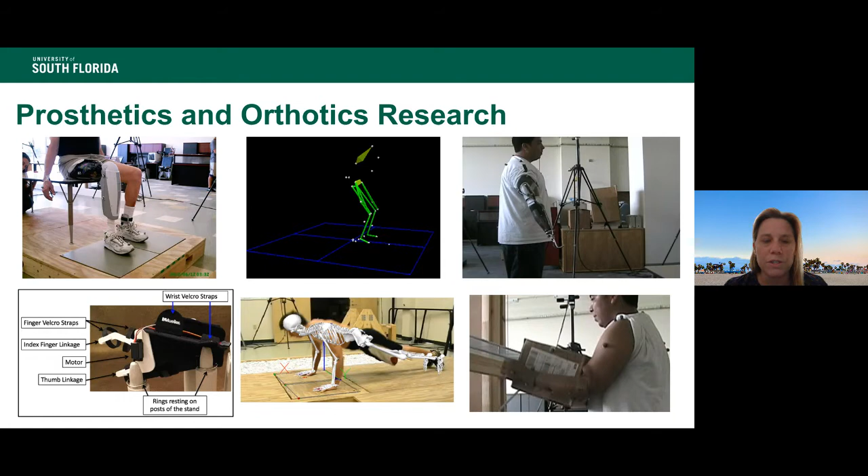So this is another project we have specifically for vocational rehabilitation. This is a virtual reality system to help train people with disabilities to get back to work, or sometimes it helps with job placement. We have a screen that we can set up with virtual situations, or we have a head-mounted display. They can work with their job coach to understand what's required of a job, or to practice particular job skills before going to an employer and trying to get a job.

We've been testing it with people with autism and traumatic brain injury, so more cognitive issues, but it's also being set up in a more portable system to try to get it into some school systems to help people with autism at an earlier age. After they go through this program, they would have a job training certificate that they could take to an employer to help with job placement.

We also have some robotic-based projects, and these are led by Dr. Redwan Alqasemi. He has various robotic arms and things that are commercially available, but what he does in his lab is add to some commercially available products and puts them on wheelchairs, adds some sensors and maybe a Kinect and some various software, working with computer scientists, and makes these types of robots helpful for people with disabilities.

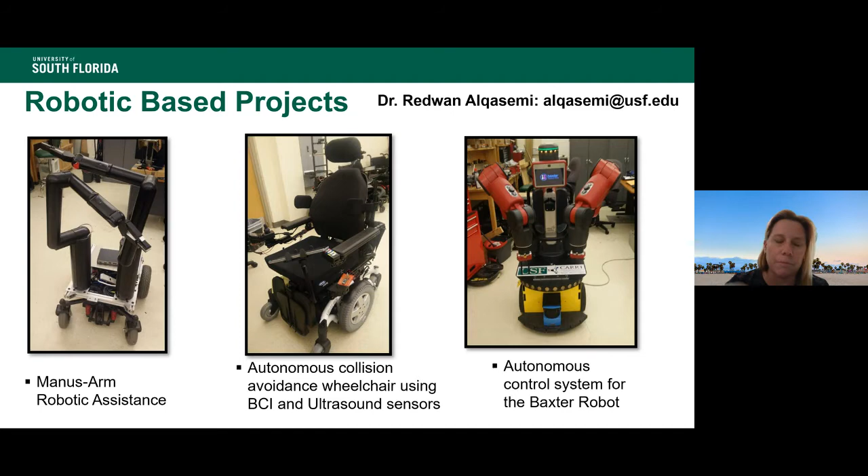A lot of times there might be collision avoidance systems that help people in a wheelchair get in and out of cars and in and out of tight spaces, or it might be a robot that can be sent out to do tasks and activities of daily living if you can't do those yourself.

I know I'm running out of time, so I'll speed up here. These are just some examples of this autonomous pick and place, where you can tell the robot to go get it. It uses 3D computer vision and will figure out how to pick up your different tablets and things if you are somehow confined to a wheelchair, for instance.

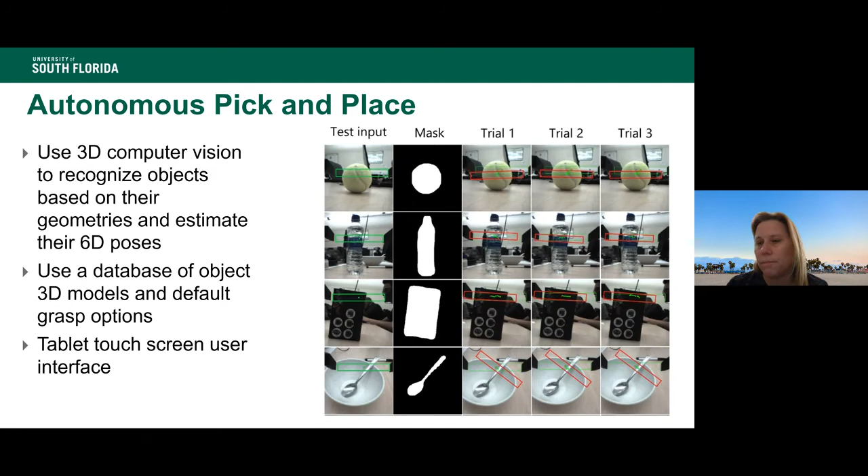We also have a CAREN system, which is a computer-assisted rehabilitation environment, and I believe Dr. Reed's probably going to talk a little bit more about it. Basically it's a virtual reality system that also has some biomechanics and a split belt treadmill and some force plates. So we can really look at some biomechanics and how people move.

I've been working with some groups looking at military training and injury prevention. We also test different prosthetic devices on here. And I've also been working with a former mechanical engineering grad student who now works at Johnson Space Center, looking at exercise devices for spaceflight.

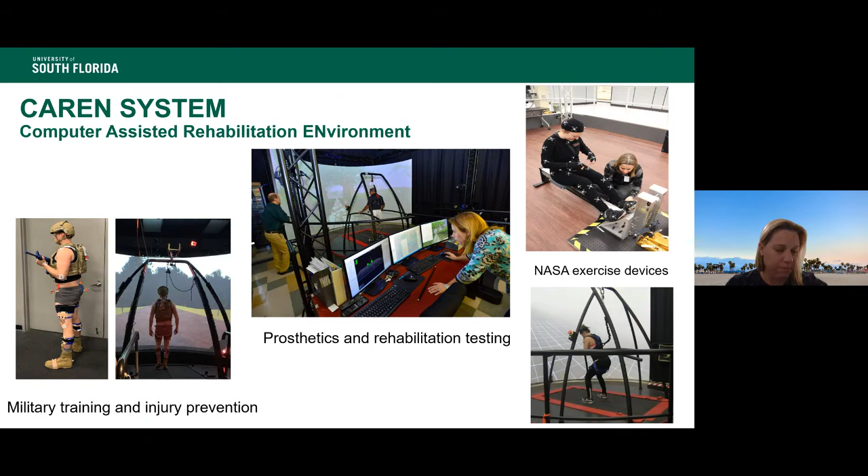I just want to mention that she had a NASA fellowship for her funding for graduate school. So that's something I could definitely help out with as well, looking at NASA fellowships as well as Florida Space Grant fellowships as a way for funding. So that's it for me.

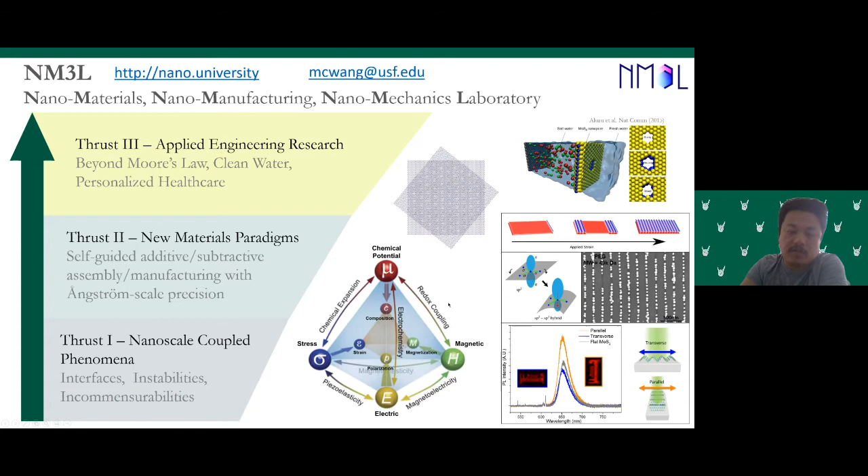So how does deformation, different stacking order, and defects in these nanoscale materials affect their interfaces, their instabilities, as well as what we call incommensurabilities? So we're looking at the coupling between processing, property, and structure relationships at the nanoscale, and using it for various applications. This is really what our focus is on: these atomic scale materials.

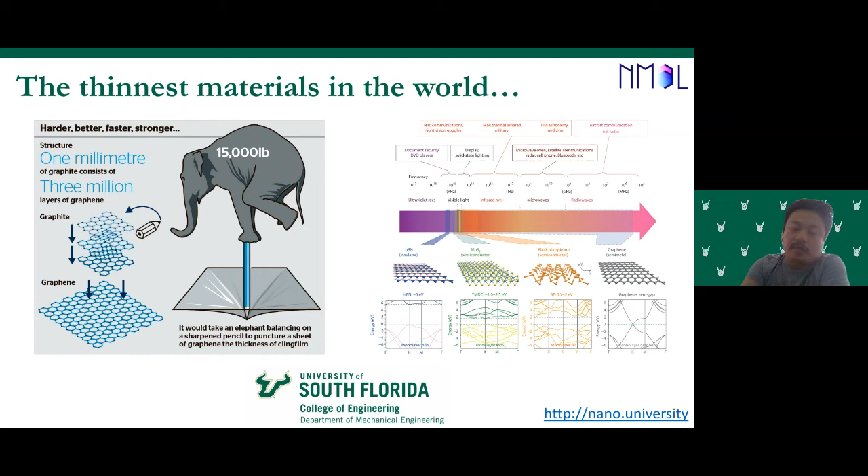A lot of you may have heard about this wonder material called graphene. Essentially, graphene is nothing but pencil lead isolated down to its atomic scale. There are actually hundreds of similar types of materials that span everything from insulating to superconducting to magnetic materials. We explore the whole gamut of these materials, using them to make devices that can supplant existing technologies across the electromagnetic spectrum.

A few topical research thrusts we have right now, some of them biomedical related with COVID, are nanopore-based biomolecular sensing and sequencers. Currently the gold standard in COVID detection is RT-PCR, reverse transcription polymerase chain reaction. This requires taking a swab, isolating the COVID RNA sequence, amplifying segments of that, and looking at fluorescent signals. That's a relatively slow and sometimes inaccurate technique, and it becomes very unreliable, especially with mutations, because you have to know what to look for to get the answer you want. When there are a lot of mutations, that can give false negatives.

Whereas for nanopore-based molecular sequencing, it's a brute force, straight-read technique where you're reading single nucleotide base pairs at a time. We're working on this technique using 2-dimensional materials—essentially you punch a hole in these 2D materials and look at the translocation event of DNA or RNA as they go through a membrane.

We're also looking at the interaction between these atomically thin 2D materials and biologic systems, looking at their cytotoxicity and genotoxicity, because even though these materials may be benign at the macro scale, when you change their shapes and sizes down to the nanoscale, there could be different interactions. So we're studying that, and we're also looking at phase change and defects in these materials.

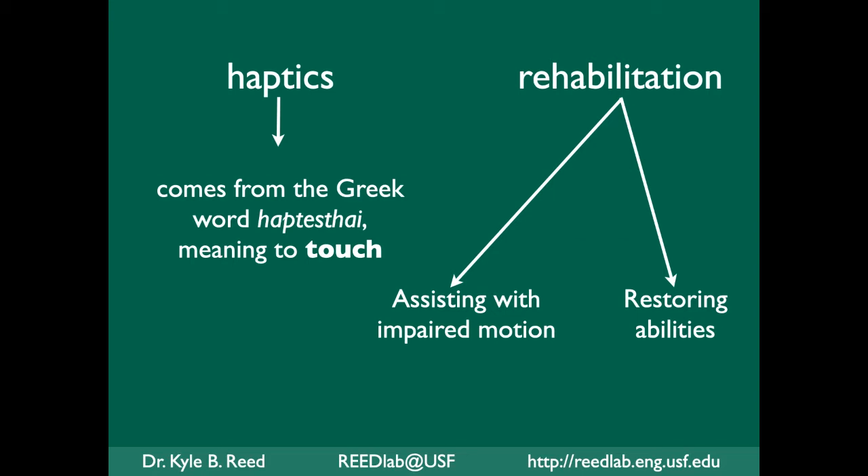The two primary areas I look at are haptics, which is the sense of touch—every time you go into your pocket and try to pull out your keys and figure out which one it is based on touch alone, that's the sense of touch, that's haptics, tactile interaction. I also look at rehabilitation, assisting with impaired motion or restoring people's abilities. Haptics and rehab actually have a lot of carryover, because haptics is trying to make healthy people's sensations better, while rehabilitation is trying to take someone with a disability and improve them. So I'm starting at different points, but trying to make everybody interact with the world better.

One example of this is looking at a bimanual motion.

If you would like to try this, you can download the app called Pat and Rub. It's only on the Apple store right now, but we'll look at porting it sometime. It's based on the idea of: can you pat your head and rub your tummy at the same time? We're trying to see what you can do with two different hands.

That's the haptic side of it. The rehab side is that you can actually use your healthy arm, when you've had a stroke, to rehabilitate your impaired arm. So we're trying to understand these bimanual motions in healthy, unimpaired people, and then apply that to helping restore motion in someone who's had a stroke or other neurological impairment in the brain.

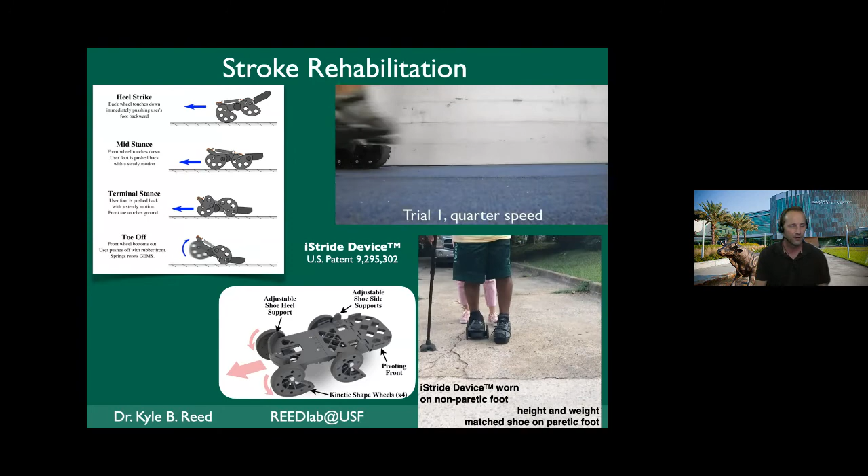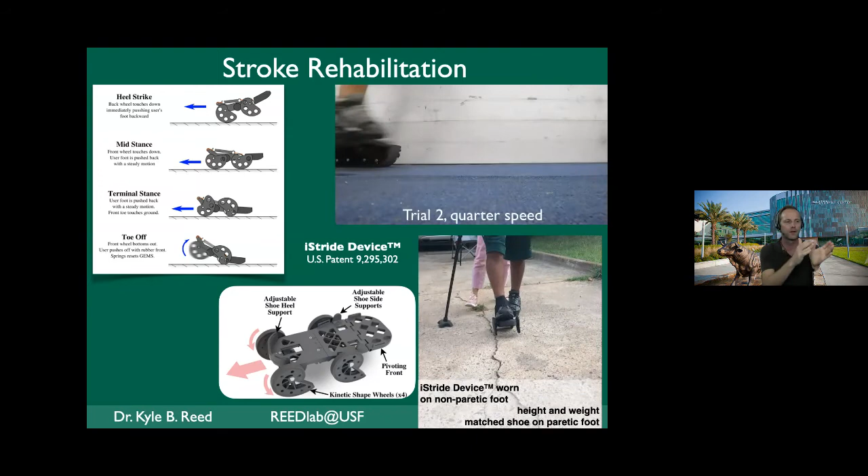On the bottom right, you'll see an individual walking who has had a stroke. We've finished a clinical trial with 21 individuals with stroke using this device, and it has shown very, very good results. So this is an example of taking the split belt treadmill from the big, expensive CAREN system and applying that same rehab ability to a small device you can bring home. We want people to be able to go home, use it more often, and we're starting to see people walking better because of this device.

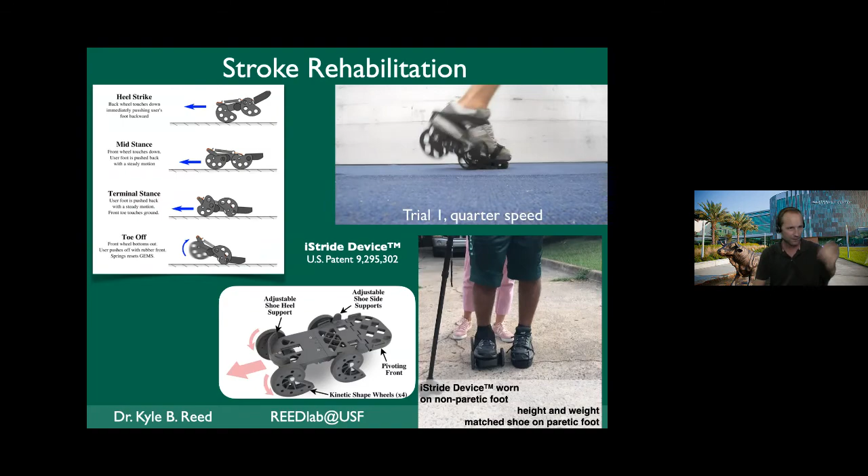Now, a lot of this research we do is in this vein, but sometimes we want to show it off a little bit and have a little fun. So here is a very large version of the iStride device that my grad students built in a couple days when they were trying to figure out a way to demonstrate it.

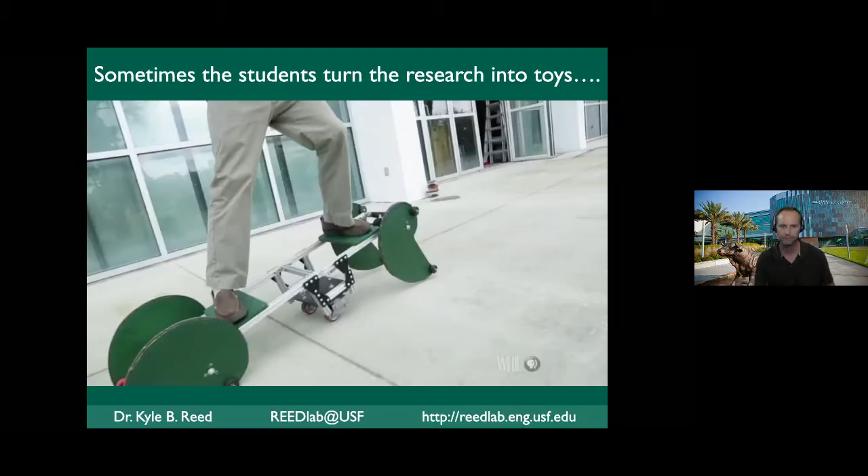Get her going. Sorry guys, sometimes it's a little sticky here. There we go. Awesome. Hi, everybody. Let me just go ahead and start sharing my screen. All right, good stuff. Okay, awesome.

You can see the screen, Celeste? Okay, so welcome. So my name is Nancy Diaz-Elsayed. I'm an assistant professor in the Department of Mechanical Engineering. I just joined this fall. And I run the Smart and Sustainable Systems Laboratory. Right now, we have a team of three researchers, a PhD student, an MS, and hopefully soon to be PhD student, as well as another MS student. And today I'm going to be talking about the projects that they've been working on and that motivates the work that we do for manufacturers.

So much of the work that I do is really to help enable small and medium-sized manufacturers to optimize their operations by leveraging smart manufacturing technologies. Prior to joining USF, I worked for Autodesk for a few years, and so I had a chance to engage with customers at the small and large end of enterprises and identify some of the challenges that they were facing when trying to implement more of these Industry 4.0 or smart manufacturing technologies.

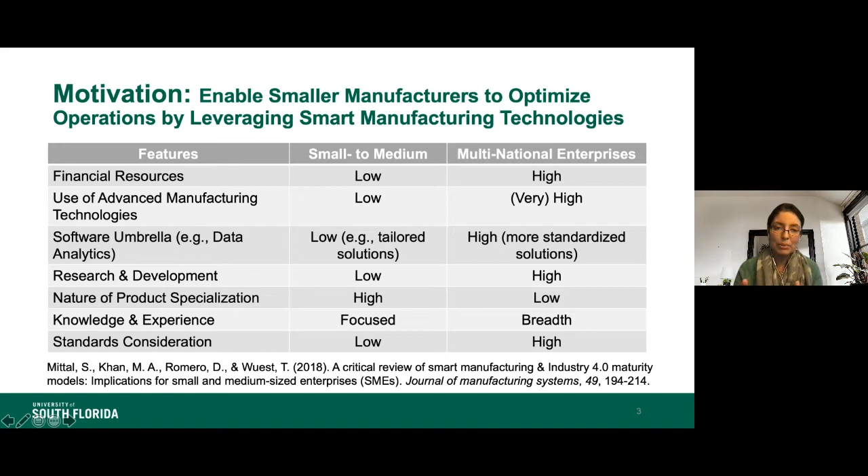So we're really targeting solutions that can help add value to manufacturers, that are accessible, and that'll make a difference overall. So when we speak to manufacturers, one of the primary factors that are motivating decision making, in addition to safety, is of course the quality of the parts that are being produced. And so one of the projects that is ongoing within our lab is on tool condition monitoring.

And so we're looking at investigating different degrees of data resolution and features, applying machine learning techniques in order to identify the degradation of a cutting tool in real time over time. That way, if we know that a specific cutting tool that is in operation cannot achieve the features necessary to produce a pre-specified part design, given the tolerances of a customer, then we can advise the operator to change their cutting tool.

And so related to this project, we're also looking at how to make recommendations for data requirements of alternative smart manufacturing use cases. We don't want our manufacturers to end up with big data lakes with a lot of data that's irrelevant, but really to narrow down the data sets within their facilities so that they could make informed decisions across their operations.

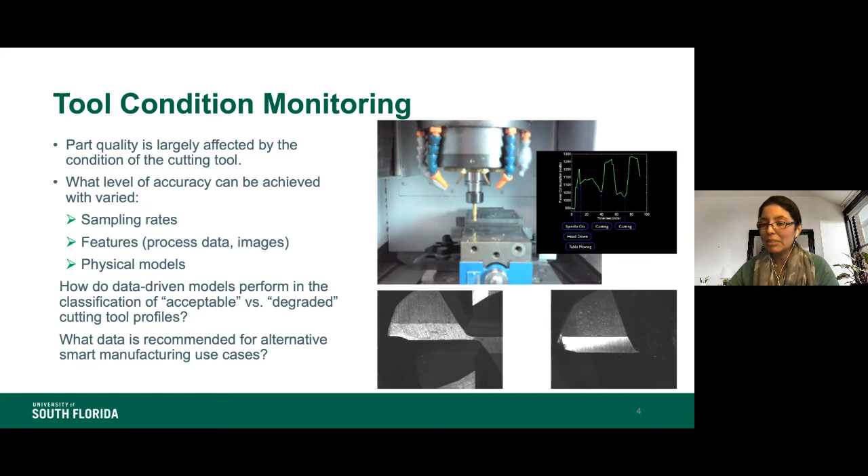And so the video that you see on the right is of a CNC machine tool, and we're plotting power consumption over time. And you can see that there's a distinct variation within the power demand. So as we turn on the spindle head, we see a peak in the power demand. As we start moving the table axes, we see variations, and then we see these hills in power demand as we're cutting.

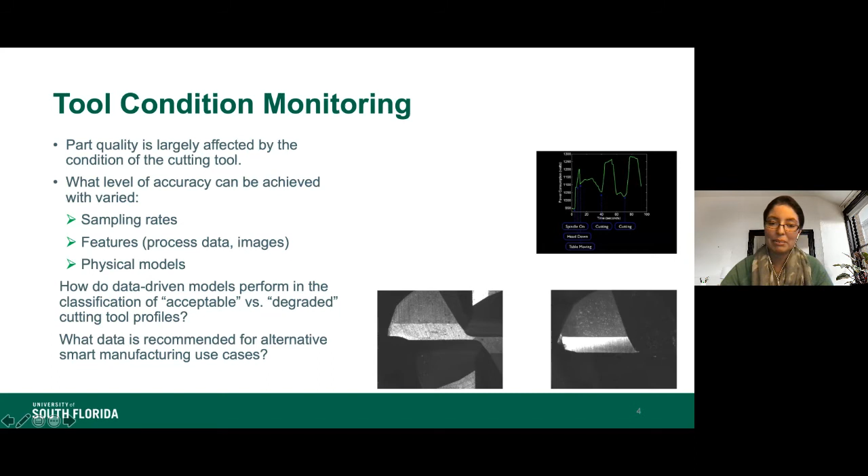Power demand is one of the features we will be tracking in our laboratory for tool condition monitoring experiments. Another project is developing a framework for smart manufacturing that considers multi-criteria decision-making processes to help a manufacturer decide whether to invest in a new system or solution for their facilities.

We're using as a use case part quality, specifically additively manufactured parts, and comparing conventional techniques versus smart technologies to see if the return on investment, resource consumption, and ultimately the value of these solutions makes sense for a manufacturer to invest in.

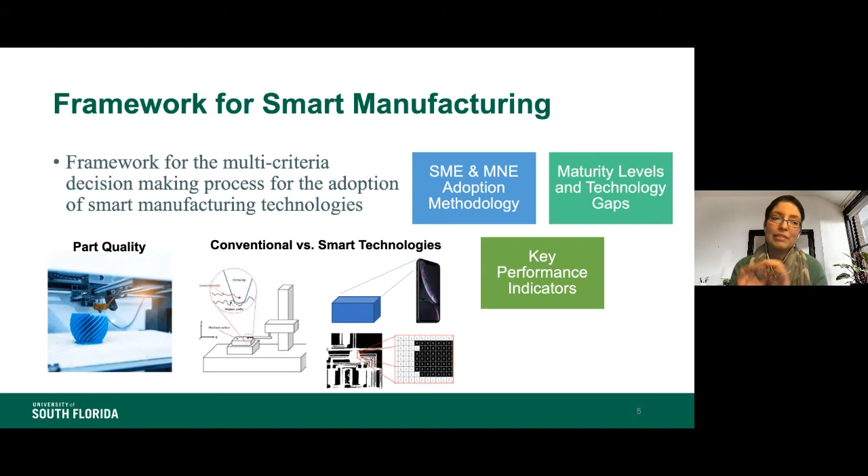We're considering the adoption methodology of different sized enterprises, the maturity levels for Industry 4.0 readiness, and key performance indicators spanning categories including performance, social conditions like safety within the facility, and sustainability conditions such as costs, energy consumption, and greenhouse gas emissions. Overall, we're creating a framework that considers multiple sets of criteria for these solutions and comparisons.

The final project I have a student working on is related to precision manufacturing and predictive diagnostics. They're building a computational fluid dynamics model of the inside of a factory, where we can see thermal dissipation. Ultimately we want a scalable CFD model of the factory that can account for airflow, thermal gradients, and pollutant dispersion.

We'll be streaming data from inside our laboratory. The hope is to ultimately pilot with industrial partners, modeling process and environmental conditions, and use this information to inform optimized production scheduling strategies.

So if we know that the thermal gradient is too high at a specific time of day, perhaps we don't want to machine parts that require very high tolerances during that time. We could shift that to cooler parts of the day, just to give an example.

A follow-on part of this project is to investigate how cutting parameters, machine operation, and environmental conditions influence the rate of degradation of CNC machine tools and their subsystems, with the ultimate aim of offering real-time maintenance strategies to our manufacturers. So that's it on my end.

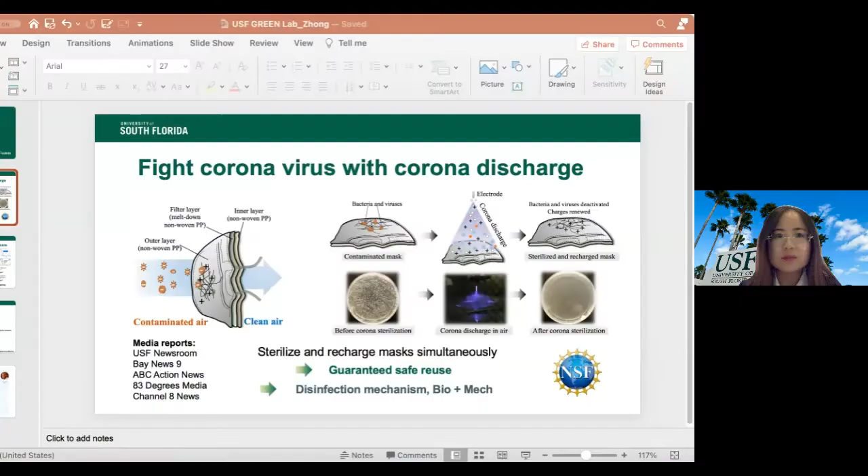Hello everyone, this is Dr. Sarah Zhong. I'm an assistant professor from the Department of Mechanical Engineering. Today it's a great pleasure to share our lab and the research we are working on with all of you. The lab I established in the Department of Mechanical Engineering in 2019 is called the USF Green Lab.

In this Green Lab, we are conducting green research for energy efficient innovations. That's what makes it GREEN, and it matches the same color as our university. Today I would like to share three major research directions in my lab.

The first one is very interesting - it reacts to the ongoing COVID-19 pandemic. This project attracted a lot of attention from the media and also NSF. We delivered our information to two congressmen and multiple media journalists. So where is the secret?

The secret is we are using corona discharge to fight coronavirus. We are trying to address the shortage of masks and the shortage of disinfectants.

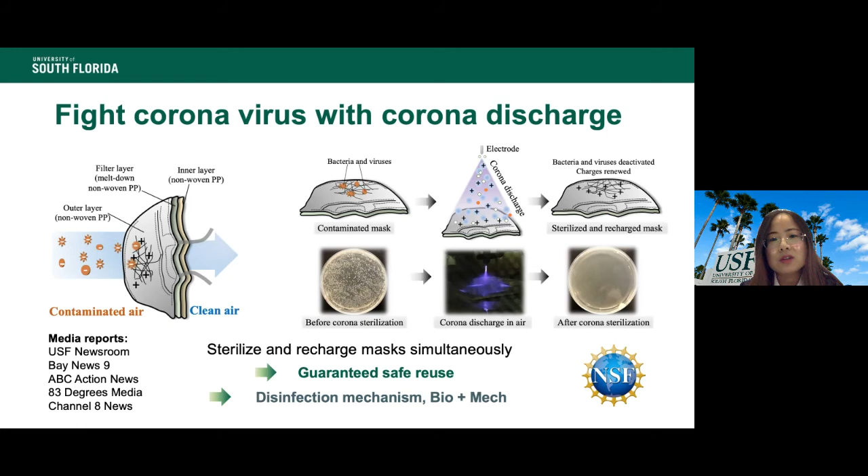So that will be a very interesting topic to work on. The next project I would like to share with everyone is the very large project. It's named Personalized Closed-Loop Wearable Healthcare Systems.

So we are dealing with a lot of signals from our body, such as EEG, EMG, representing our organs, including the brain, the heart, and every piece of muscle in our body. We have a very specially developed printing technology in our lab, and we have already submitted 2 patents. With this technology, we have proved that we can print different kinds of materials, including conductive materials, and make those sensors very sensitive to strain. We can also test acoustic signals, including strength and frequency, and temperature change. In the future, we are looking to allow our sensors to test chemicals and gases.

This technology has the benefit of being able to realize roll-to-roll manufacturing and also nano manufacturing. The final goal is to help us realize personalized closed-loop wearable healthcare. Here, personalized means we're integrating our technology with machine learning to help address health issues for each individual. And closed loop means we can address the issues from sensing to diagnosis, and also the final treatment for everyone.

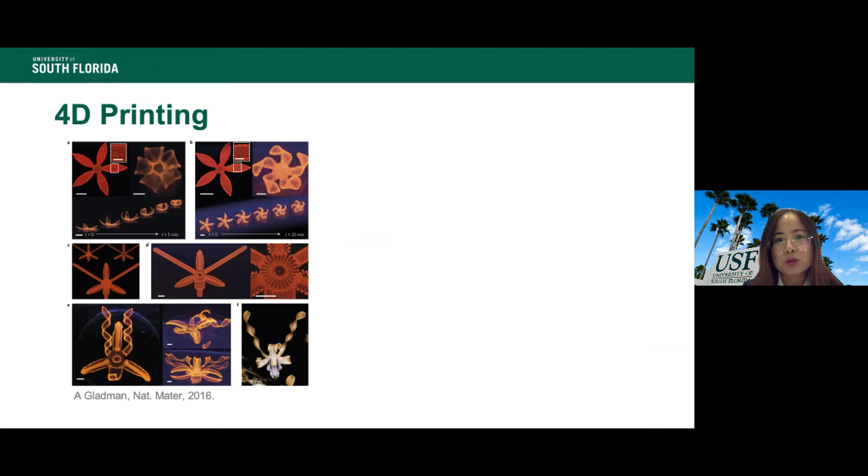So the third technology I would like to share with everyone is also multidisciplinary and a very interesting topic. It's 4D printing technology. 4D printing here actually means we use 3D printing to print shape memory polymers. The 4D is time, which means under external stimulations, the shape of the structure will get changed. By leveraging the advances from 3D printing and shape memory polymers, we will have two major directions.

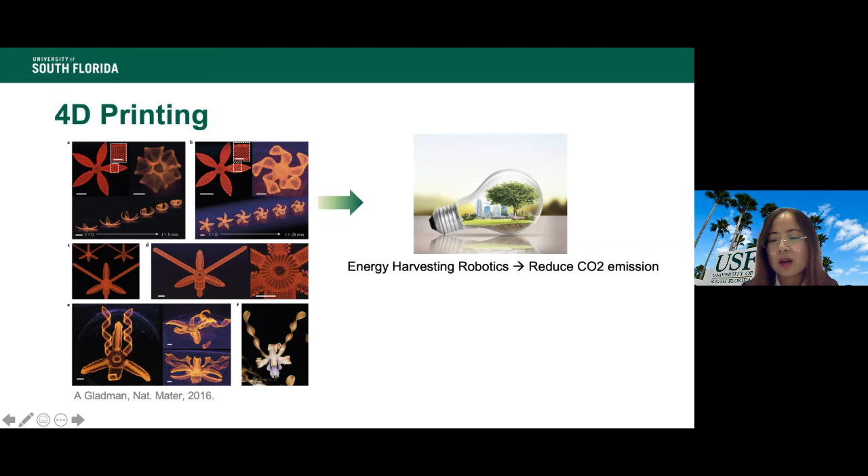One is energy harvesting robotics to address the very serious carbon dioxide emission problem for the entire world. And the other very interesting topic we will work on, currently collaborating with multiple researchers, is directed dynamic organ growth. The final goal is, again, to realize personalized healthcare.

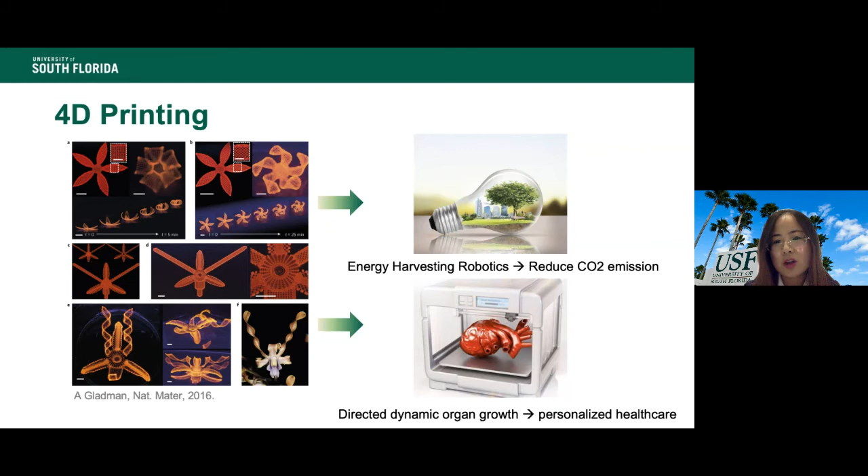Thank you very much.

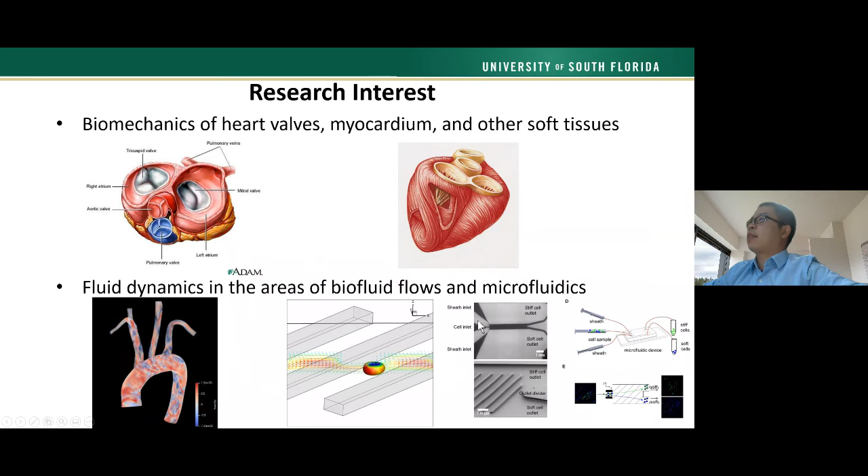So the research of this lab is focused on biomechanics of heart valves, myocardium, and other soft tissues. For example, this figure shows the heart valves of the human heart, and this shows the fibrous structure of myocardium. This lab is also interested in studying fluid dynamics in the area of biofluid flows and microfluidics. For example, the animation here shows blood flowing through the aorta, and this figure shows the design of a microfluidic device with the help of computational modeling. This device can be used to separate cells with different stiffness.

We're mainly using 2 computational approaches in our lab: finite element analysis for solid mechanics, and computational fluid dynamics for fluid flow. If these 2 methods are coupled, we can solve a lot of problems involving fluid structure interactions. For example, blood flow through a soft aortic valve, and also the intraventricular flow in the beating human heart with 2 heart valves.

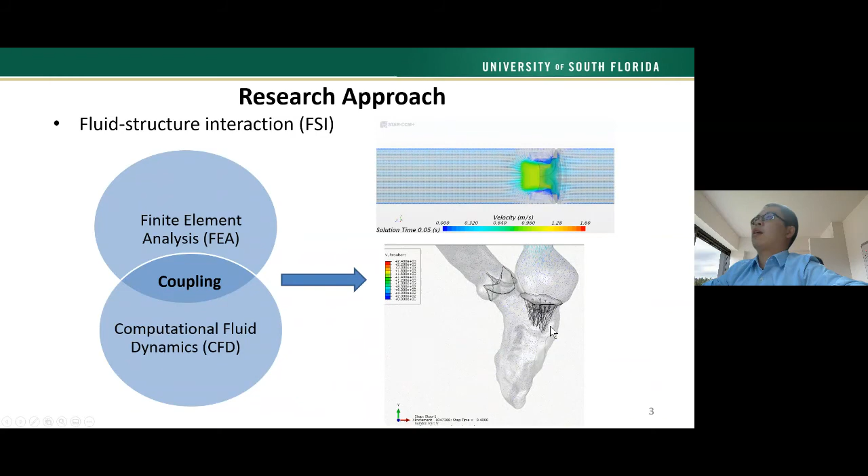Okay, I will briefly talk about 2 ongoing projects in our lab. One is the modeling of ventricular myocardium. The objective of this study is to develop a physics-informed machine learning model to evaluate and predict the behavior of a beating heart in a cardiac cycle.

So first, because it's physics-informed, we first establish a constitutive model. Here we consider both the passive material response of the myocardium and the active contraction of the myocardium.

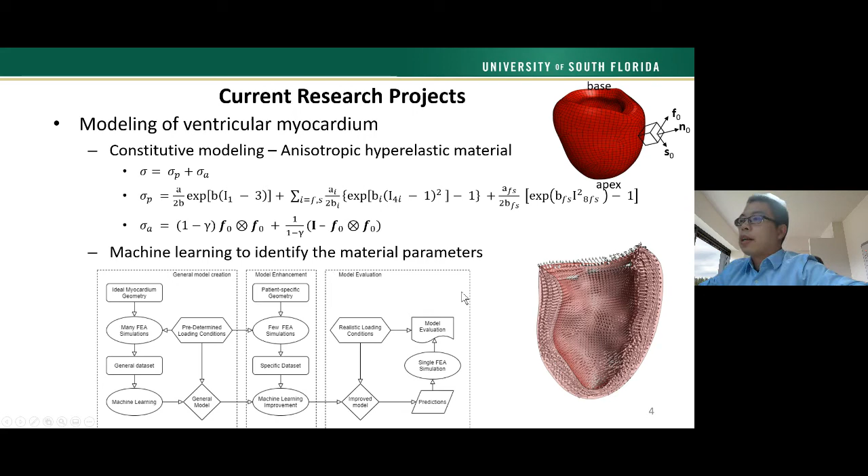With these models, we conduct hundreds of finite element simulations, varying the material properties and fiber orientations. We use the generated database as a training set to train a machine learning model, and we find that the random forest regressor model gives the best results.

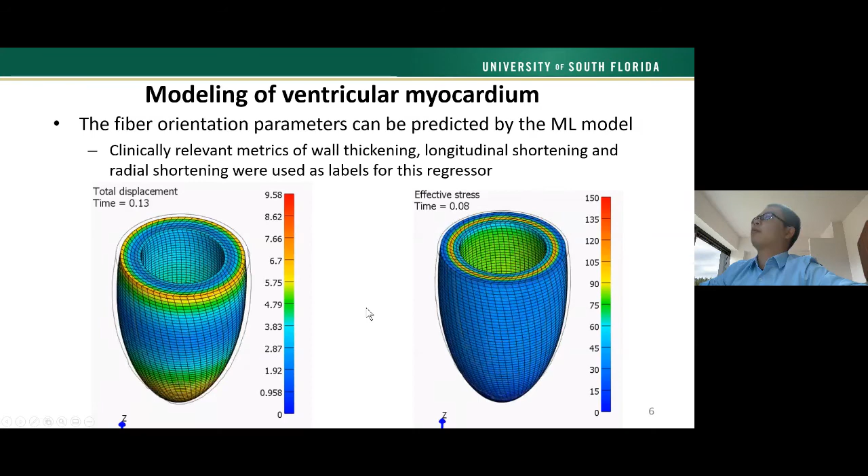Another project is the CFD simulation of blood flow in the aorta, the largest artery in the human body. In this model, we first established our geometry from segmentation of clinical images such as MRI or CT scans, then reconstructed the model by smoothing it. We then created the CFD simulations from this geometry with some simplifications, but considered the time-dependent velocity profile at the ascending aorta.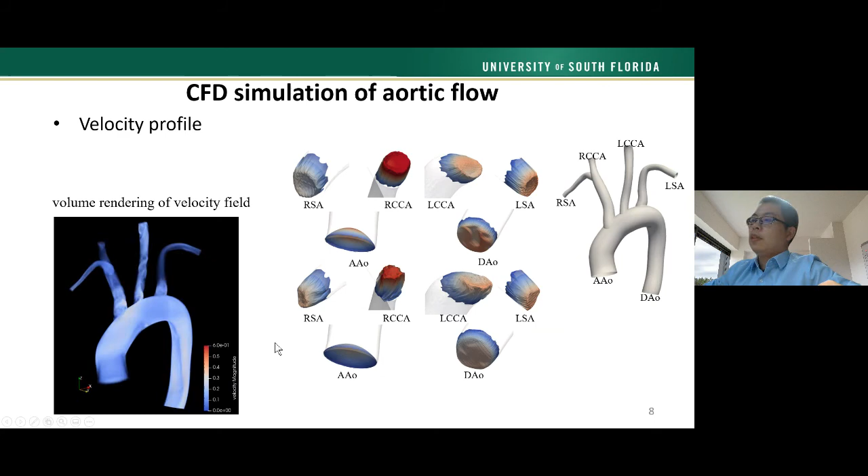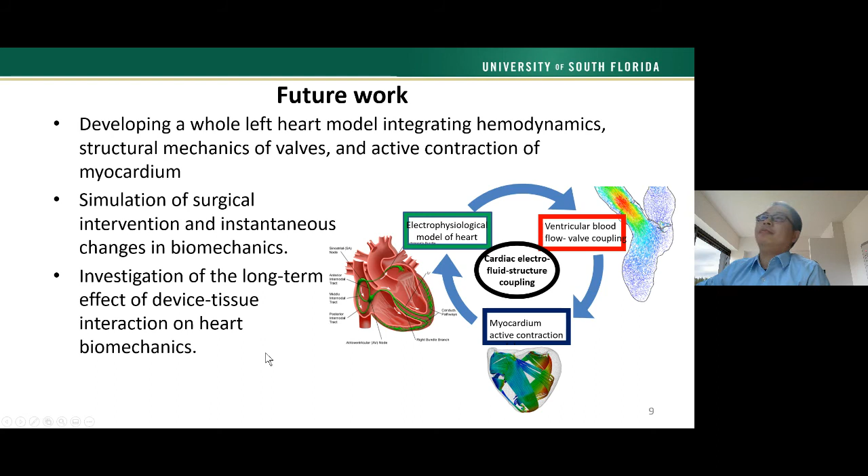And when you're ready, you can share your content, and I'll go ahead and put that up. Okay. We're good to go.

So yeah, I'm Dr. David Murphy. Hello to all the students out there who are thinking about grad school as an option. I'd like to tell you a little bit about my work here in the Murphy Fluids Lab. I'm an assistant professor in mechanical engineering here, and the goal of my lab is to explore the role of fluid mechanics in biology, ecology, and the environment in order to find inspiration, often bioinspiration, for solving human engineering problems.

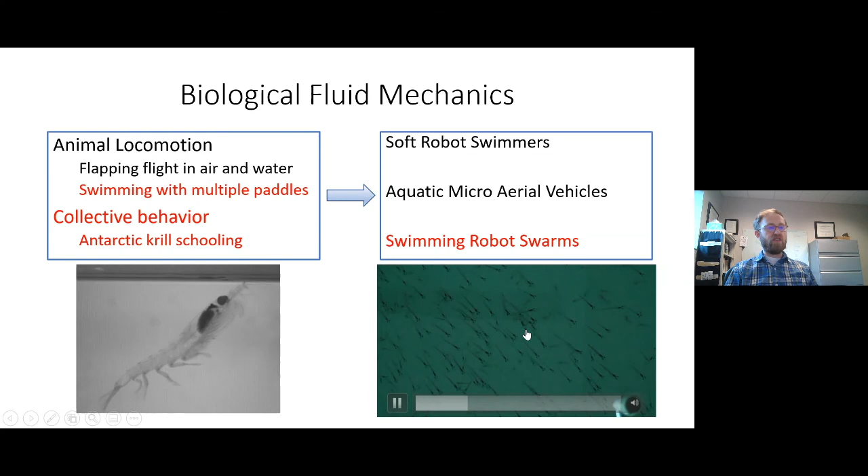We're also interested in collective behavior of multiple organisms, so our model organism for that is the Antarctic krill. That's one of the reasons we go to Antarctica, which you can see here. And here you can see all these krill swimming together. We're studying how they swim together with the idea of eventually developing swimming robot swarms.

We're also interested in COVID. That's a very hot topic right now, very interesting. So we have a little COVID simulator, or breath simulator, to study the aerodynamics of COVID transmission. That's an active area of research.

So if you're interested in learning more, feel free to email me. Thanks.

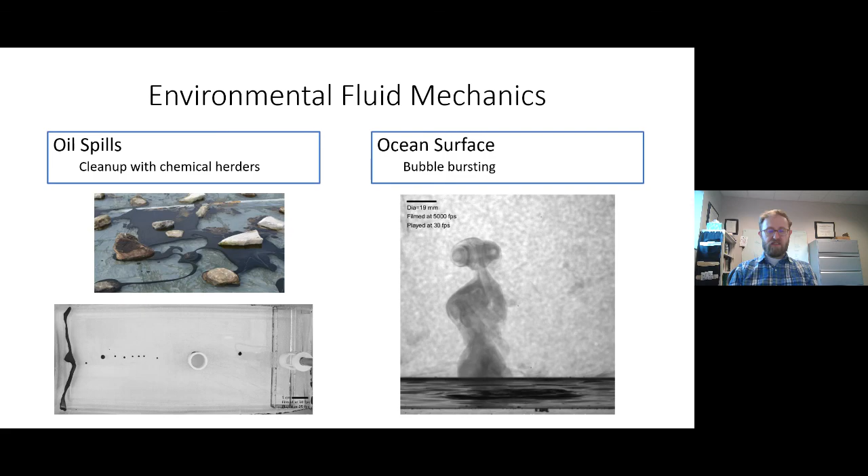Can you guys see me? Yes, okay, I'm live. Hello everyone, I'm Rajiv Dubey. I'm department chair for mechanical engineering. I'm also director of the Center CART, Center for Assistive and Rehabilitation Robotics Technologies. And I believe Dr. Stephanie Carey may have talked about it earlier, is that right?

So that's correct, yeah, I guess we have a couple of minutes left. I just wanted to welcome everybody and hope you will apply to mechanical engineering graduate school here. As you can see, we have research in lots of different interesting areas, from robotics and prosthetics, advanced materials, nano manufacturing, computational fluid dynamics, biofluidics, advanced manufacturing, data-driven sustainable design, and so on. So there are so many different, and all these research projects are funded by National Science Foundation, Department of Defense, a lot of other agencies.